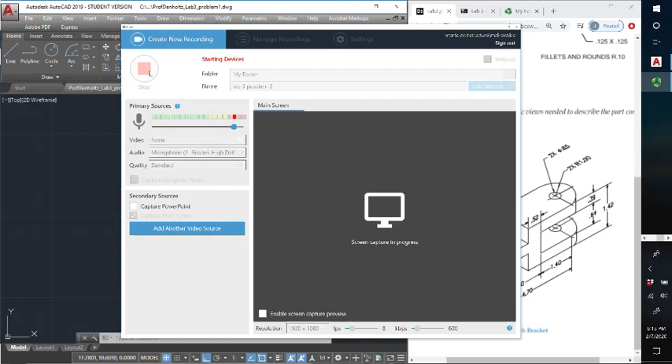All right, this is Professor Denholtz. I'm going to be discussing problem 2 of lab 3, and we can see it here. This is what it is.

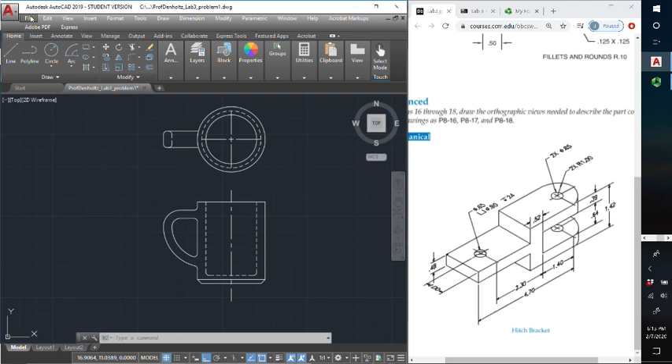And as usual, when we start, we're going to open up our template, so that way we have all of our layers built in beforehand. And I'm going to save this as Professor Denholtz Lab 3 Problem 2.

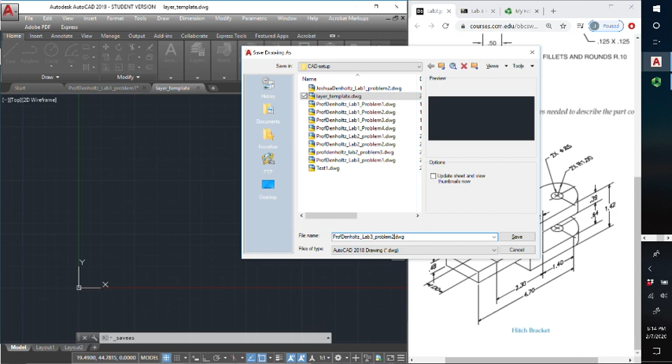All right, so when it comes to this drawing, this is the first time in the class where the way you see the drawing is not the way that you should draw it. So this is an isometric view. So we can see each of the sides equally. We can tell that there's height, width, and depth from this single image.

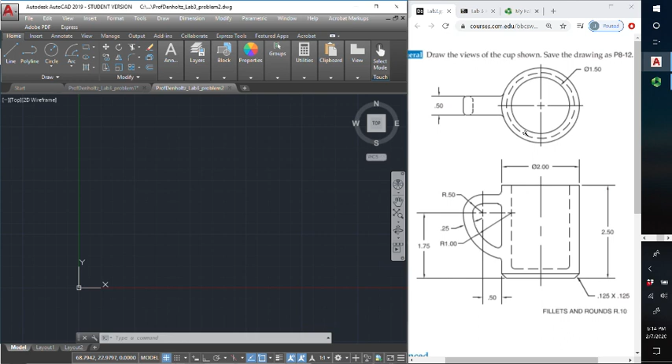Whereas if we were to look at this mug, we know that this is the top and we know that this is the front. And so each one of these, there's a face that we're looking at exclusively. But here we could see a little bit of the front, a little bit of the top, and a little bit of the side. And so we have to take this drawing where we could see all the sides and convert it to an orthographic view where there's a top, a front, and a side. So it would look something like this, where we have multiple views of this single object.

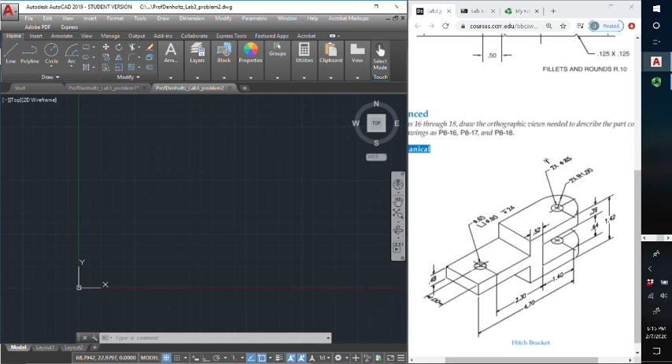So that's the first thing. The first thing is that we are not drawing it the way we see it. And if you do that, it will hurt your grade because you won't be drawing the right thing. So you have to make sure that in this case, you are drawing the orthographic view.

And so if you see the front face, I would make this the front face. It has almost a tuning fork like shape. That's probably the way I'd describe it. Whereas if we're looking down here, we would see this circle, we would see this circle, we would see the curve of this side. But when we're looking at the front view, we would just see a straight line where there's a curve over here. And so we would see straight edges on the front view, but we would see this curve if we're looking at it from the top.

Now, if you're looking at it from the side view, you can either be looking over here at the object, or you could be looking over here at the object. And you have to choose if you want to be doing the right or the left side view.

Now, additionally, the other key thing about this part is this is the first time that I am not going to draw the complete drawing in the video. For all the other videos, I drew the complete part, but in this drawing, I'm going to draw the exterior shapes. So I'm going to help you understand how to draw and get these shapes as orthographics, but I am not going to include information on all of the solid lines, hidden lines, and center lines. So it is going to be up to you to complete the drawing, which I am going to start.